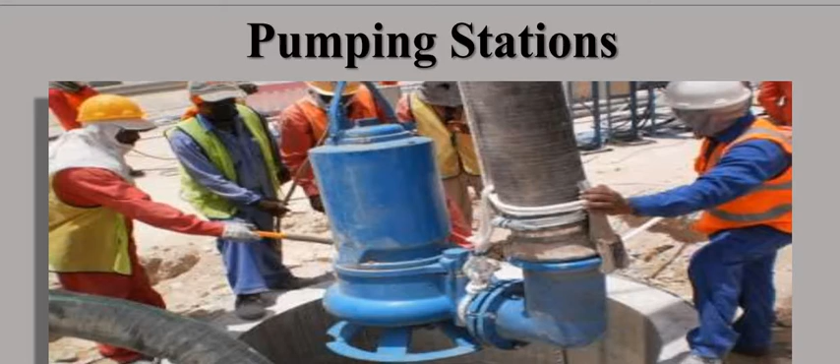Today we are going to discuss the new topic of sewage pumping and its stations, why it is necessary and where it is located. First we will go to the introduction section.

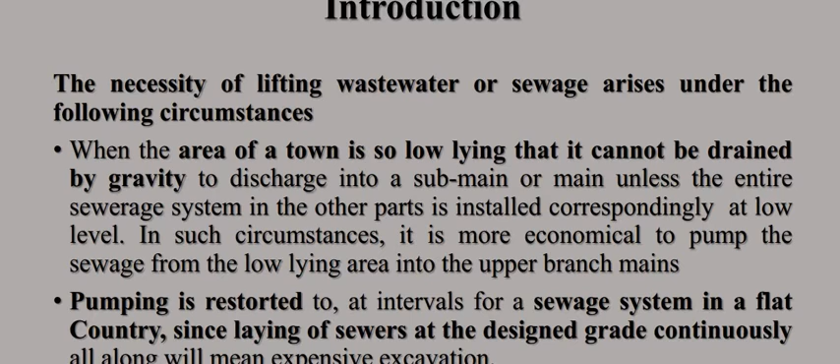The necessity of lifting the wastewater or sewage arises when the area of the town is so low lying that it cannot be drained by gravity to discharge into a sub-main or main, unless the entire sewerage system in the other parts is installed correspondingly at a low level. In such conditions it is more economical to pump the sewage from the low-lying area into the upper branches. The necessity of pumping arises when the wastewater cannot flow under the action of gravity, so we have to utilize the pump for lifting.

Similarly, this case arises when the area of the town is so low lying that it cannot be drained by gravity to discharge into the sub-main or main sewer, unless the entire sewerage system in the other parts is installed correspondingly. Hence the sewage in such areas should be pumped, as it is more economical to pump this sewage from this area.

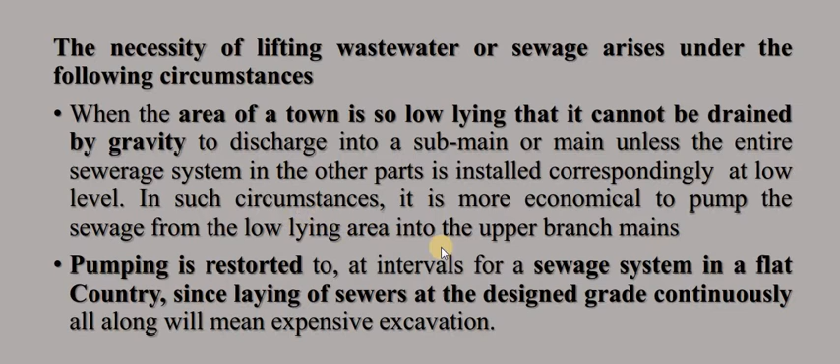Pumping is resorted to at intervals for a sewage system in a flat country, since laying sewers at a design grade continuously all along would mean expensive excavation. If we are working with a low or flat gradient, we will have to adopt pumping, because continuously maintaining the proper gradient or grade would require bearing expensive excavation. In such conditions, pumping is more economical than the conventional process of excavation to maintain the gradient.

Similarly, the necessity of pumping arises when the outfall sewer is at a lower level than the body of water into which it is to be discharged, or when the outfall is lower than the entrance to the treatment plant. The outfall sewer is the last point of the sewer, used to discharge into the other unit, and hence pumping arises in such conditions.

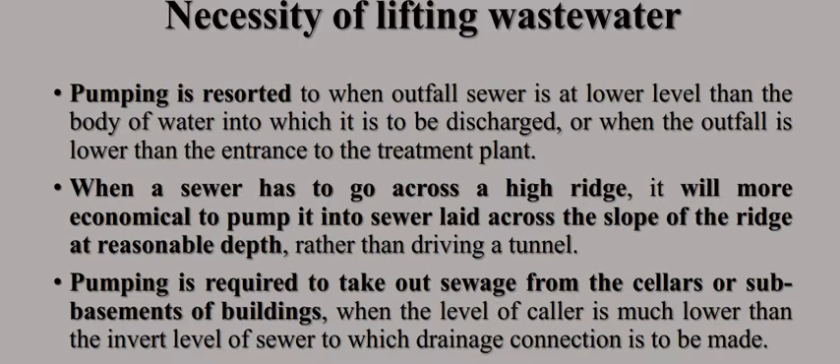Similarly, when a sewer has to go across a ridge, such as in hilly areas, it is more economical to pump the sewer across the slope of the ridge at a reasonable depth rather than driving a tunnel. In hilly areas we cannot drive a tunnel to pass sewage from one area to another when crossing a ridge, so pumping has to be adopted.

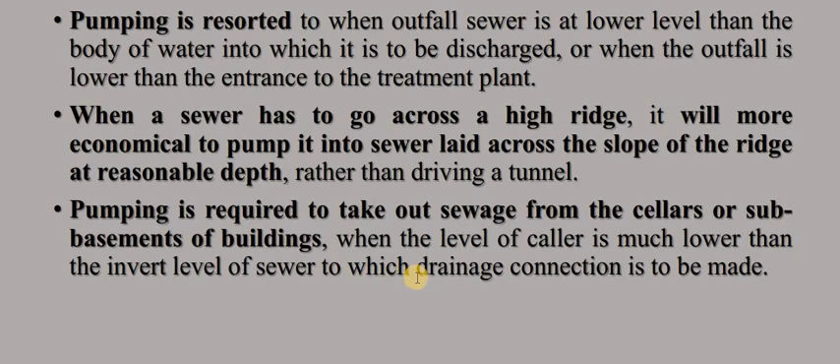Pumping is also required to take out sewage from cellars or sub-basements of buildings when the level of the cellar is much lower than the invert level of the sewer to which the drain connection is made. This means pumping is required from sub-mains, basements or sub-basements of residential buildings when the cellar is much lower than the invert level of the sewer, so we have to collect that sewage and transfer it into the existing sewer line.

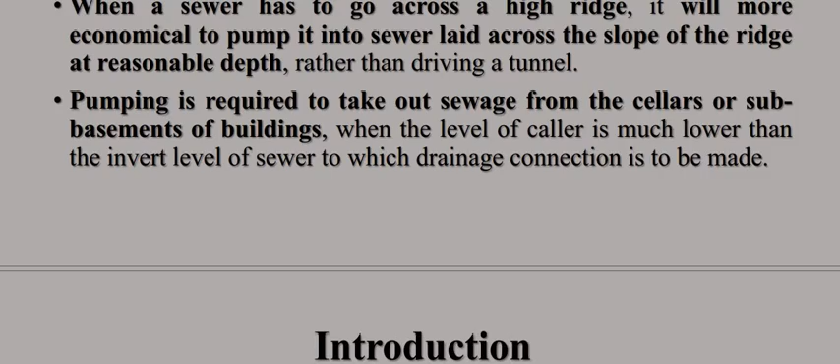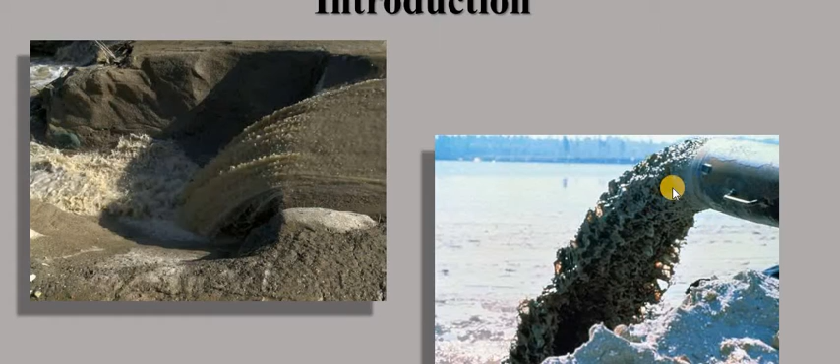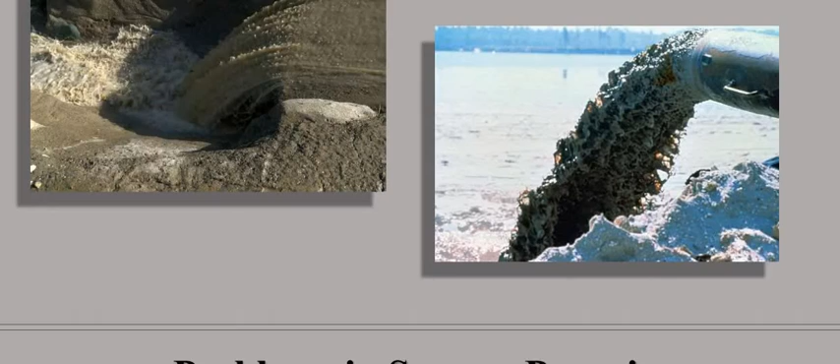These are existing photographs. This shows the hill areas where sewage passes from a ridge, and this is an outfall sewer where pumping is done to meet the water treatment unit and the collecting intake structure.

Now, what problems arise in sewage pumping? The pumping of sewage is not as simple as pumping of water, because the following special problems are associated with sewage.

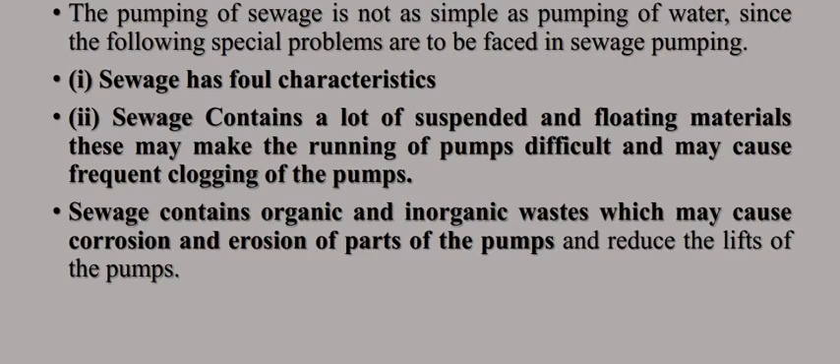First, sewage has foul characteristics. Second, sewage contains lots of suspended and floating matter, which may hinder the running of pumps and cause frequent clogging. Also, sewage contains organic and inorganic waste which may cause corrosion and erosion of the pumps, reducing the actual discharge efficiency. These are the basic characteristics associated with sewage, making its handling much more difficult than handling water.

Similarly, sewage contains lots of suspended and floating matter like grit and other materials, and this may cause frequent clogging of the pump.

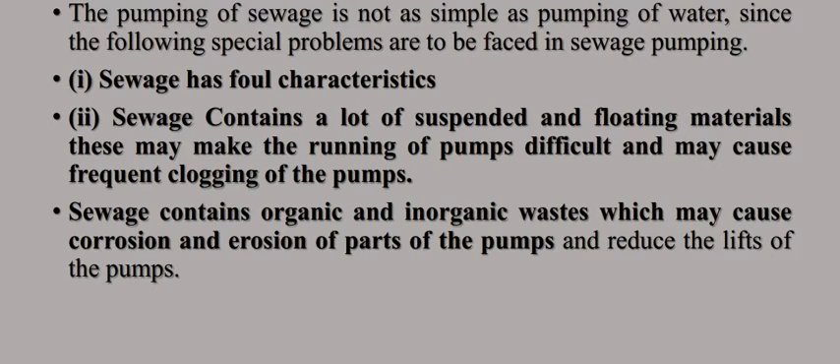Similarly, sewage contains organic and inorganic waste which may cause corrosion and erosion of the parts of the pump, and it reduces the lift of the pump and its life.

Now, what are the problems in sewage pumping? First, the rate of flow of sewage varies continuously, and hence pumping operations are to be adjusted accordingly. Second, the size of sump is limited, since large size sumps will result in the settlement of silts and organic matter at its bottom. Third, the pump should be of high order reliability, since failure of pumps will lead to flooding which may cause unbearable nuisance.

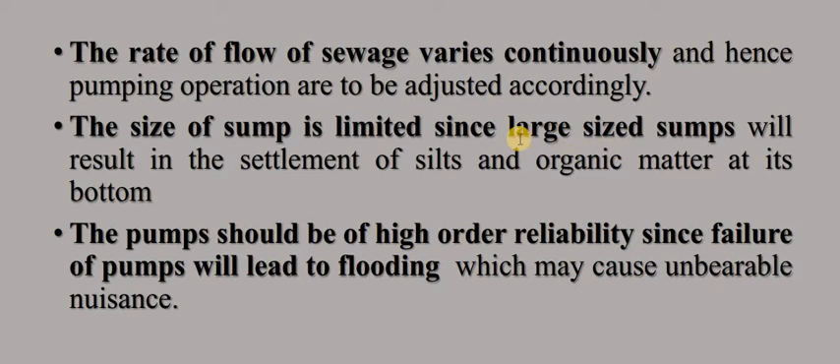So these are the basic problems we face while sewage pumping, along with its requirements: the rate of flow of sewage varies continuously; the size of sump is limited, since large sumps result in settlement of silts and organic matter, making it difficult to drain out or remove the settled sludge; and the pumps should be of high order reliability, since failure will lead to flooding.

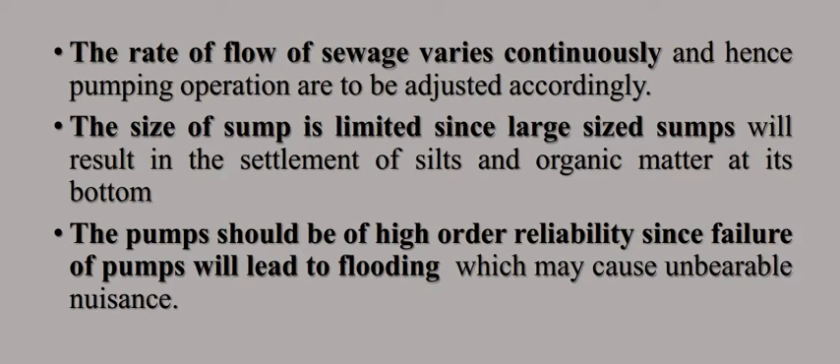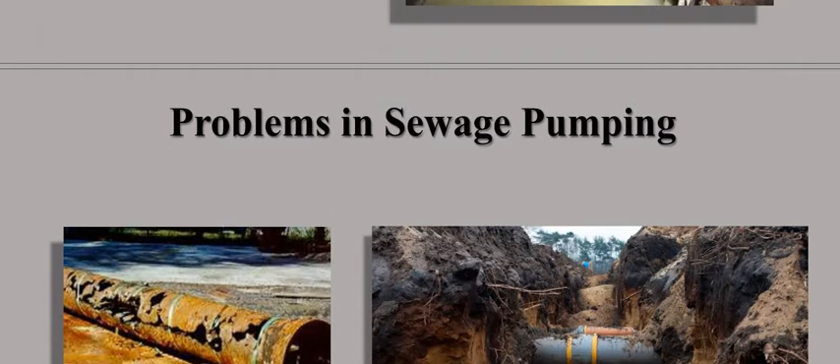These are pictures shown of actual sewage pumping. The rusted pipeline, corroded pipeline, the actual sewage pumping line shown in this figure.

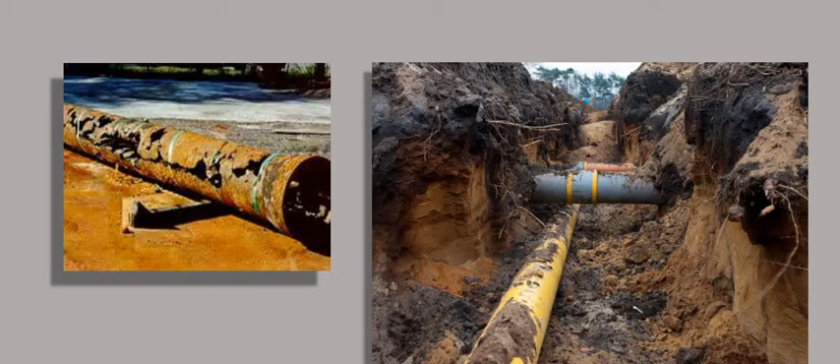Now, pumping station and location of pumping station. Which location or site should be selected for the pumping station? Proper location requires a comprehensive study of the area to be served, to ensure that the entire area or zone can be adequately drained.

If a large quantity of sewage is to be pumped, the site should be nearer a stream, a nallah, or a storm water drain into which sewage could be discharged during emergencies such as breakdown of the pumping plant or failure of power. In such situations the site should be near the stream where the sewage can be discharged, and during such emergencies it can be handled as is.

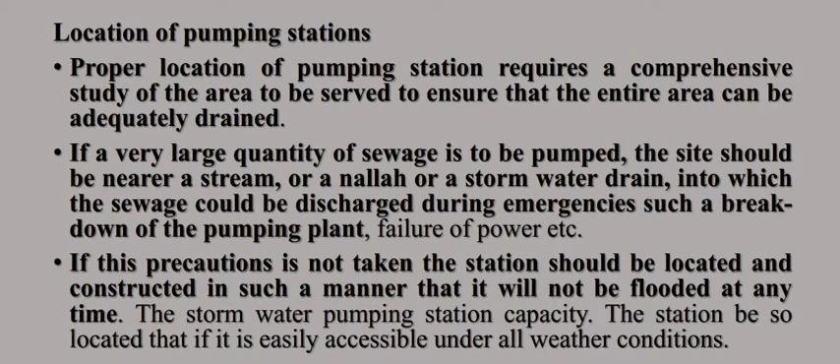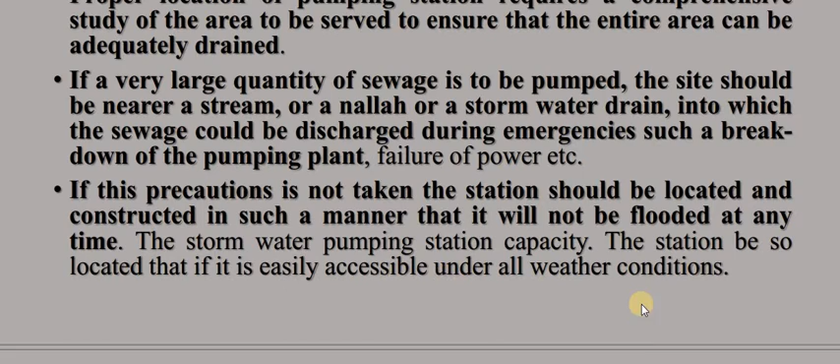If this precaution is not taken, the station should be located and constructed so that it will not be flooded at any time. The storm water pumping station capacity and location should ensure it is easily accessible under all weather conditions, meaning it should not be flooded by storm water. These are actual photographs showing where pumping stations are located.

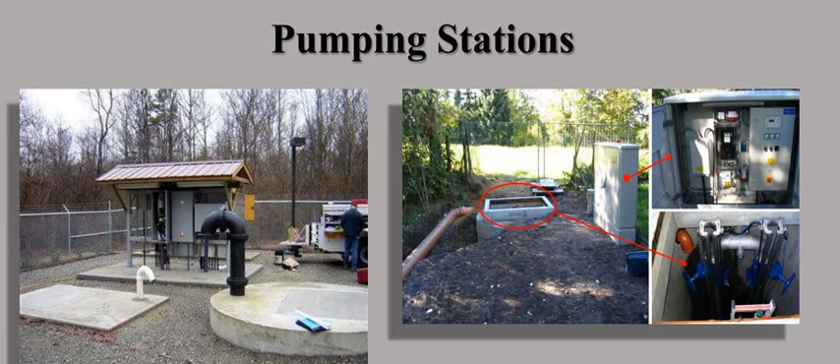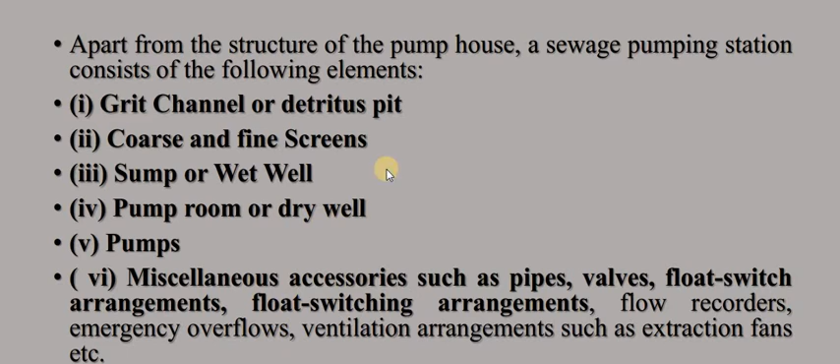Now, what are the elements of pumping stations? Apart from the pump house structure, a sewage pumping station consists of the following elements: grit channel or detritus pit, coarse and fine screens, sump or wet well, pump room or dry well, pumps, and other miscellaneous accessories such as pipes, valves, float switching arrangements, flow recorders, emergency overflows, and ventilation arrangements such as extraction fans. These are the components involved in the pumping station during the sewage pumping process.

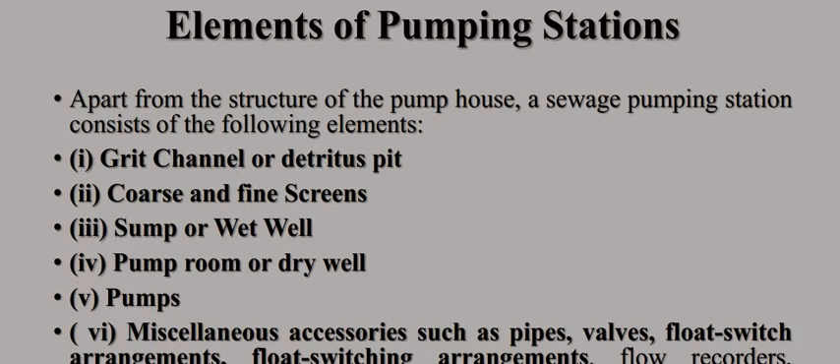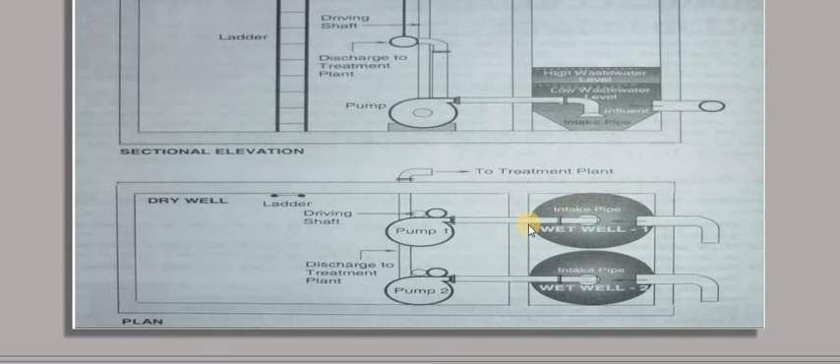Now we will see the sectional elevation so it will be easier to understand. After the sectional view of the plan, we come to know there are two components: dry well and wet well. In the dry well, the pump and its accessories are installed, and in the wet well the sewage water collected from the locality or zone is stored.

This is the intake pipe, and the influent sewage is collected at the wet well. The pump, having a suction pipe, is attached to that wet well, and the rising main, that is the delivery pipe, is attached to the treatment plant discharge pipeline. This is the driving shaft, since a motor operates the pump, and this leads to discharge at the treatment plant.

A ladder is provided so that we can easily access the structure for frequent maintenance if required. So these are the elements of the pumping station.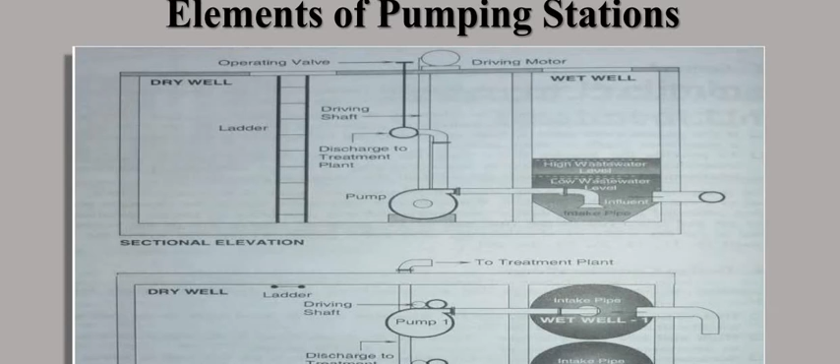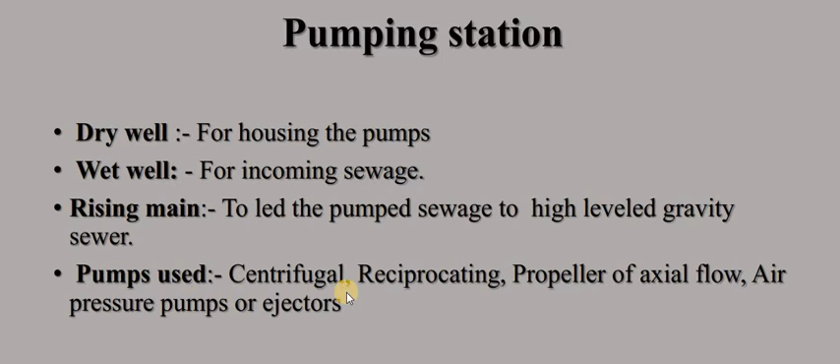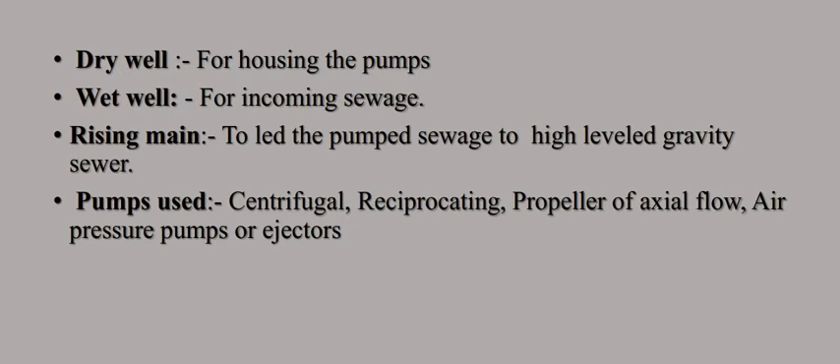So what is a pumping station? Its elements include the dry well, wet well, rising main, and pumps used. What are the various types of pumps used? Centrifugal, reciprocating, propeller or axial flow, air pressure pumps, or ejectors. These are the elements of the pumping station, that is, the pump house structure.

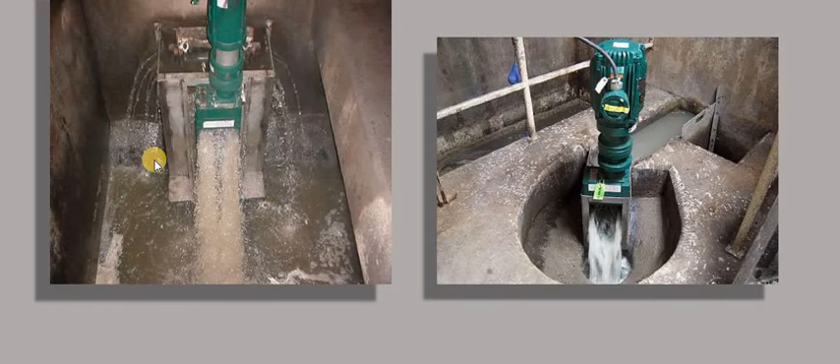We have seen this just now, so we will skip the theory. This is the actual working photograph of sewage pumping.

Now, pump house structure - a grit chamber is provided. The sewage entering the pumping station contains a lot of indestructible solid matter such as grit, rags, sticks, feces, etc., all in suspension as long as the sewage is flowing. It is essential to remove this matter before pumping to minimize wear and tear of the pump impeller and rising main. The grit is separated from the sewage by providing a grit chamber or after providing a screen. A grit channel is a long basin channel with enlarged cross section. You first have to understand what the grit chamber is - it is a chamber provided in the pump house structure.

In which all the suspended particles which can settle by their own weight after the process of screening are settled, so that grit particles such as grit, rags, sticks, sand, etc., which remain in suspension in the sewage flow, can be settled or removed. This minimizes wear and tear of the pump impeller and prevents it from coming in direct contact with the pump, removing it preliminarily before it enters the pumping station. So we generally provide a grit chamber before the sewage enters the sewage pump, and hence the grit is separated from the sewage by provision of a grit chamber before or after the screens.

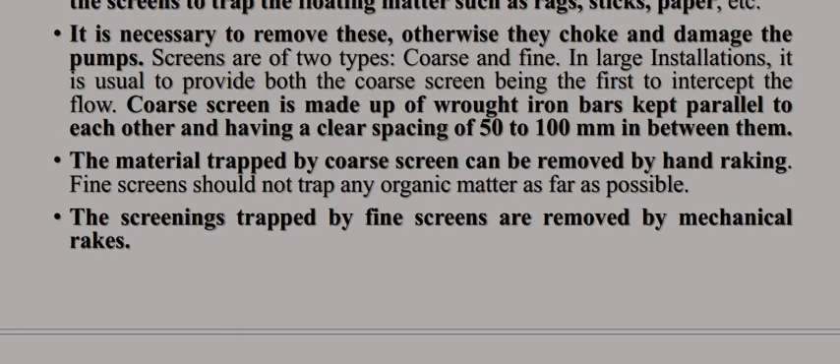Similarly, these are the screens. Screens are provided after the removal stage - sewage is made to pass through screens to trap floating matter such as rags, sticks, papers, etc. It is necessary to remove this material, otherwise it will choke and damage the pumps. Screens are of two types, coarse and fine. In large installations, it is usual to provide both, coarse being the first to intercept the flow. Coarse screens are made of wrought iron bars kept parallel to each other with clear spacing of 50 to 100 mm, and material trapped by coarse screens is removed by hand raking, while screenings trapped by fine screens are removed by mechanical rakers.

So these are the screens which are generally provided after the grit chamber, so that fine materials settle in the grit, and floating matter is arrested in the screen. The collected matter in the screens can be removed by hand raking in coarse screens, and in fine screens it is removed by mechanical rakes. Okay, moving ahead.

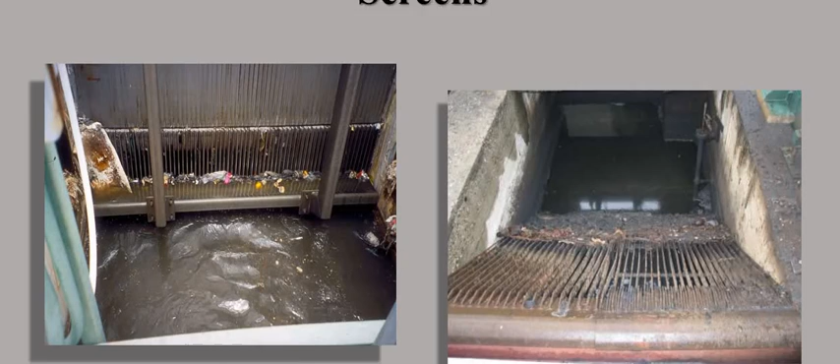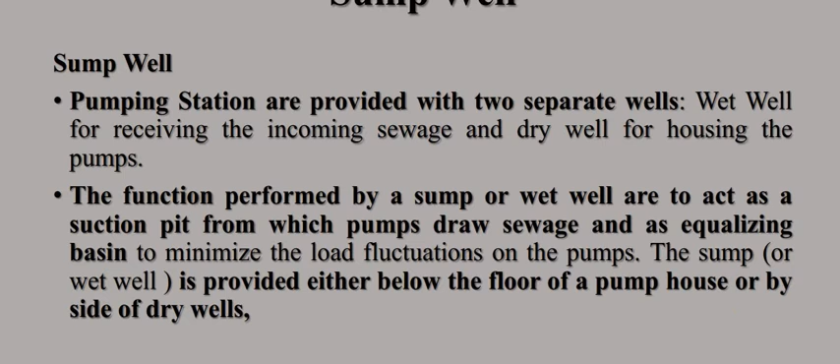Sump well - pumping stations are provided with two separate wells, a wet well for receiving the incoming sewage and a dry well for housing the pumps, which we have just now seen in the elements of the pumping station. This is the sump well in which the sewage is collected.

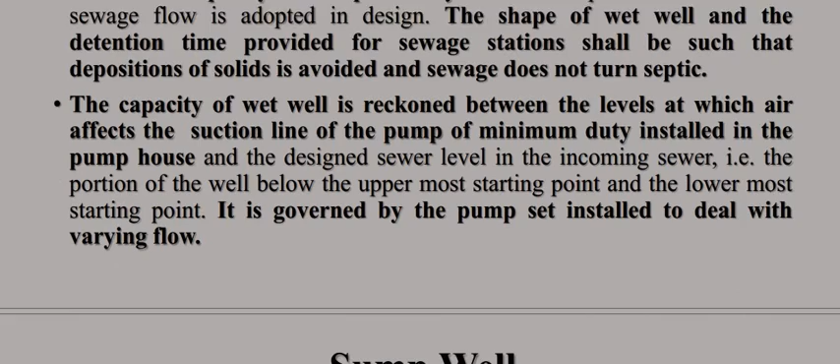Now, rising mains, valves and fittings. This means the pumped sewage is led to a high level gravity sewer through rising mains. The rising mains are made up of steel, cast iron, spun iron, or asbestos cement pressure pipes. Generally, cast iron pipes with flange joints are provided. The flange joint provides easiness in dismantling for repair of pumping station equipment. The length of the discharge pipe should be kept as small as possible because long detention of sewage in closed pipes under pressure causes anaerobic deterioration.

This is a very important line: as far as possible, the rising main should rise steadily from the pumping station to the point of discharge. The velocity of flow in the rising main should not be less than 0.75 meter per second, and at the same time velocity higher than 2 meter per second should be avoided.

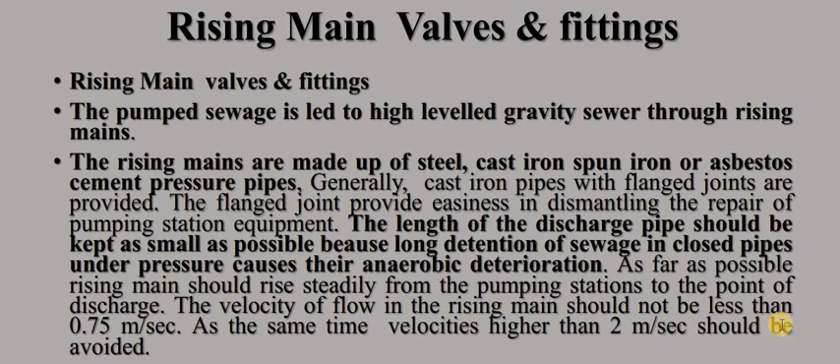You have to understand what rising main is - it is the delivery pipe, made up of steel, cast iron, spun iron, or asbestos cement. Generally cast iron pipes with flange joints are provided, because it is easy to dismantle or repair the pumping station equipment. Now this is the most important line, because the length of the discharge pipe should be kept as small as possible, because long detention of sewage in closed pipes under pressure causes anaerobic deterioration.

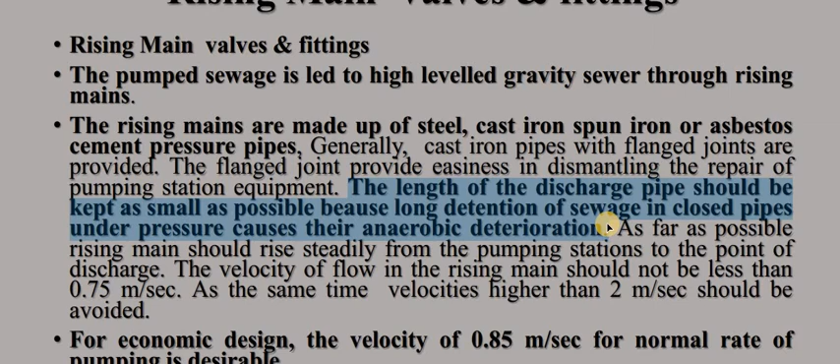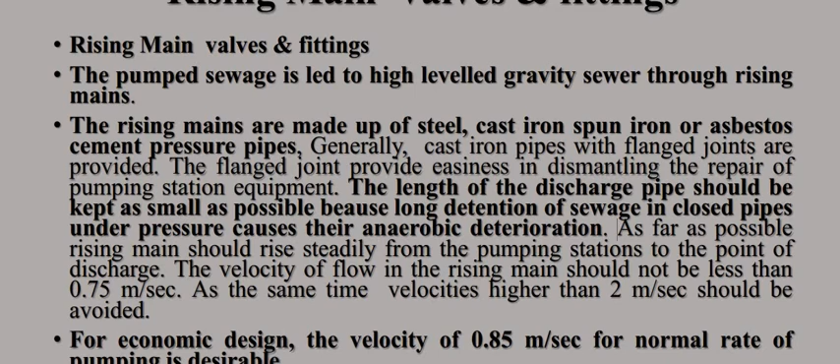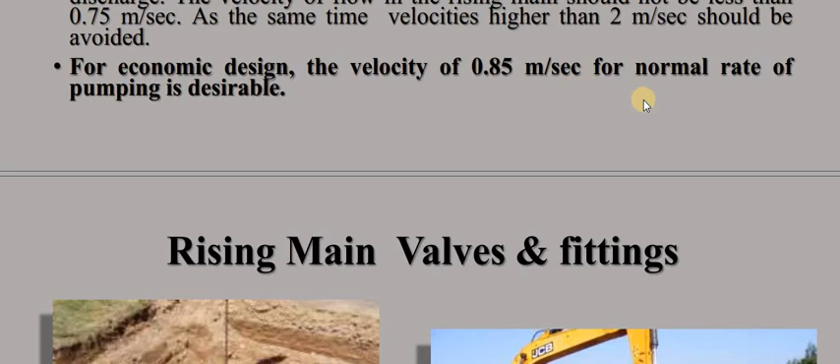Because if we use long pipes to carry the sewage discharge from the rising main, anaerobic decomposition will start in the pipe itself, and this is the reason we have to keep the discharge pipe as small as possible. For economic design, a velocity of rising main of 0.85 meter per second for normal rate of pumping is desirable. So these are the rising mains - the discharge pipe, valves and fittings.

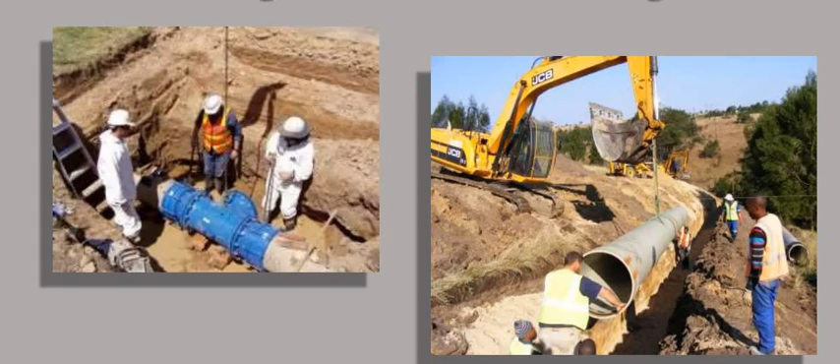Now which valves are provided? A reflux or non-return valve is provided on the rising main just next to the pump to prevent backflow through the pump when the pump is stopped.

A check valve should be provided in the sewer line discharging the sewage to prevent backflow of sewage during floods in the river or discharging area.

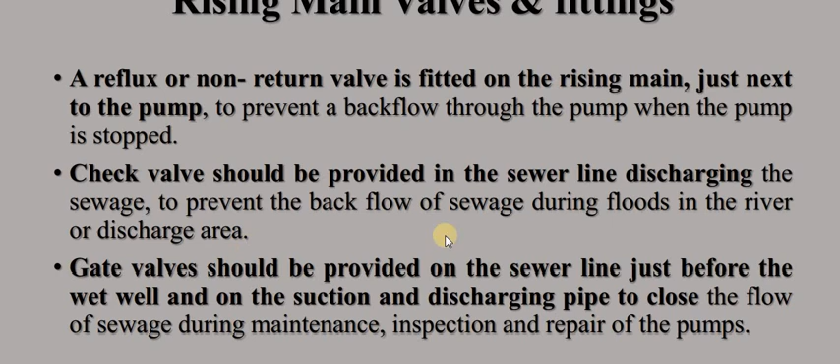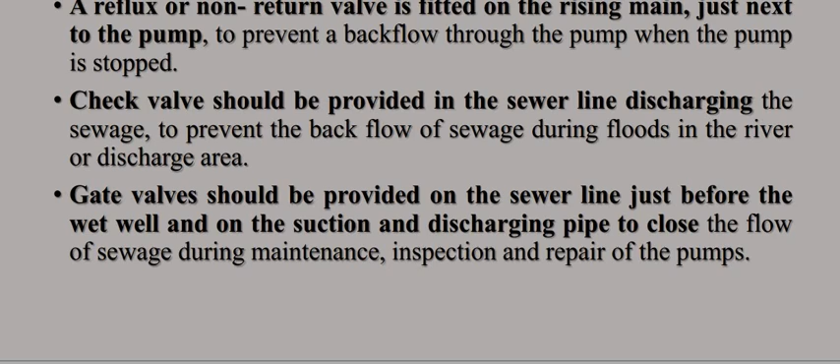Similarly, a gate valve should be provided on the sewer line just before the wet well, and on the suction and discharge pipe, to close the flow of sewage during maintenance, inspection and repairs. So these are the fittings: check valves, non-reflux valves, and gate valves.

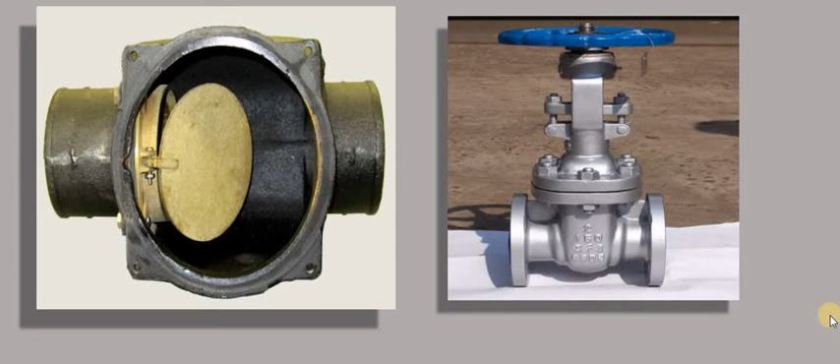Which types of pumps are we using? Following are the types of pumps commonly used for sewage and storm water pumping: first, most commonly, centrifugal pumps; second, reciprocating pumps; third, propeller or axial flow pumps; and fourth, air pressure pumps or ejectors, sometimes called pneumatic ejectors. Moving further, we will see the pump types in detail.

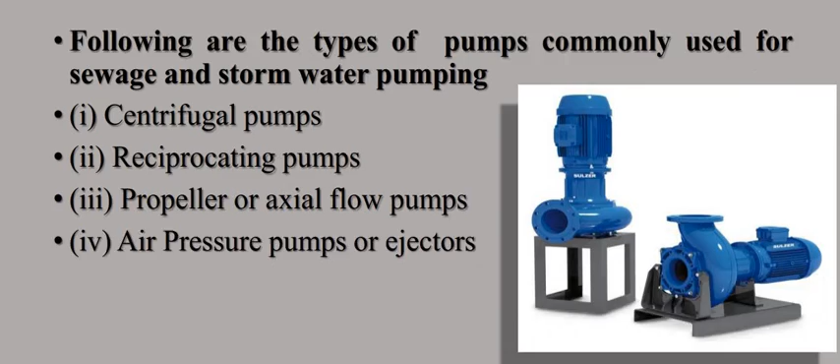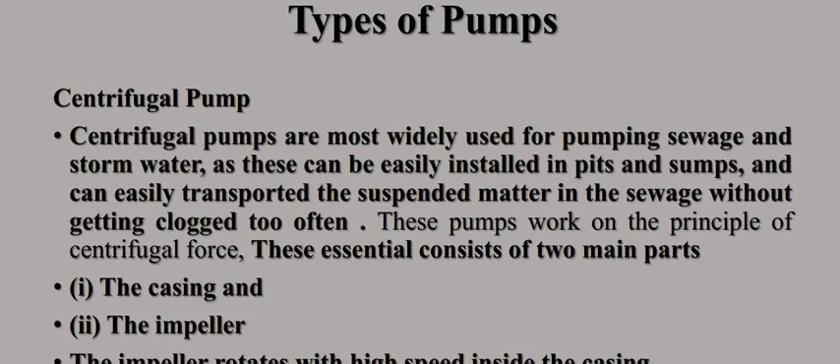The types of pumps - first, centrifugal pumps. Centrifugal pumps are most commonly and widely used for pumping sewage and storm water, as they can easily be installed in pits and sumps and can transport suspended matter in sewage without getting clogged too often. These pumps work on the principle of centrifugal force and essentially consist of two main parts: the casing and the impeller, which rotates at high speed inside the casing.

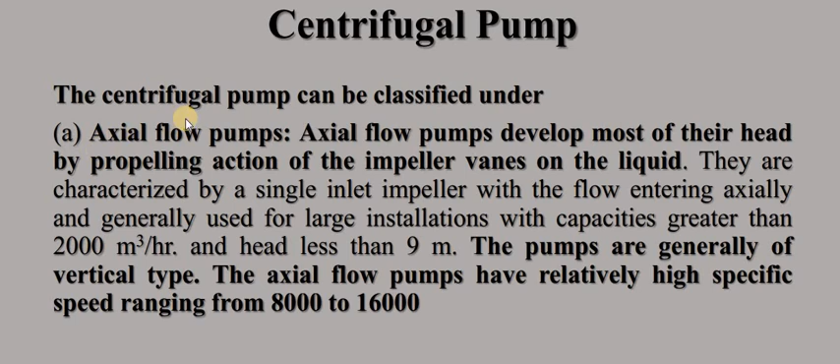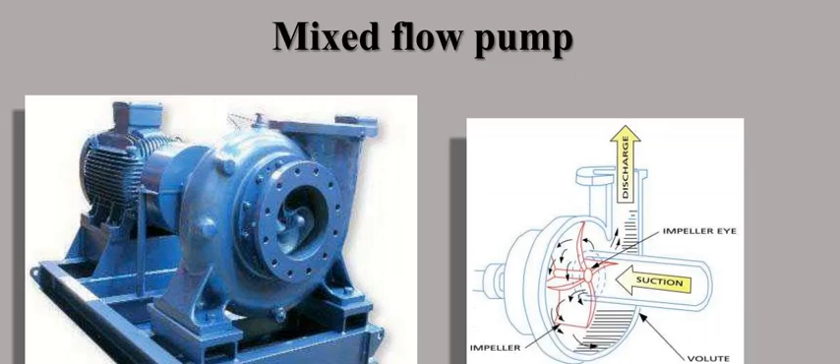Now, next is reciprocating pumps. Reciprocating pumps are more or less obsolete in modern sewage pumping stations, since they are liable to get clogged by solids or fibrous materials, even though the sewage may have to pass through coarse screens. Also, their initial cost is higher and efficiency is lower than that of centrifugal pumps.

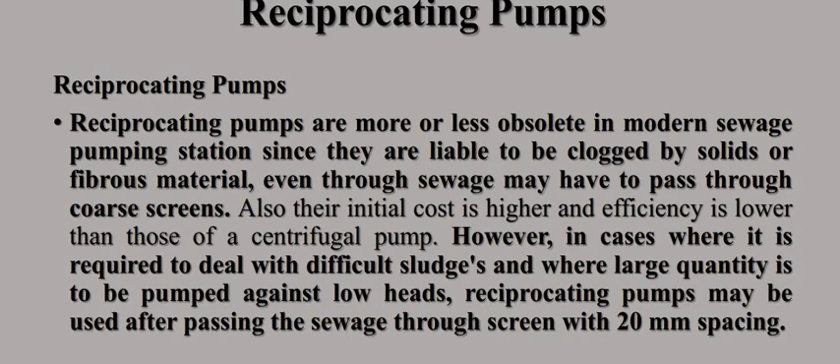However, in cases where it is required to deal with difficult sludge and where a large quantity is to be pumped against low head, reciprocating pumps may be used after passing the sewage through a screen with 20 mm spacing. Reciprocating pumps are of two types: the ram type and the propeller type.

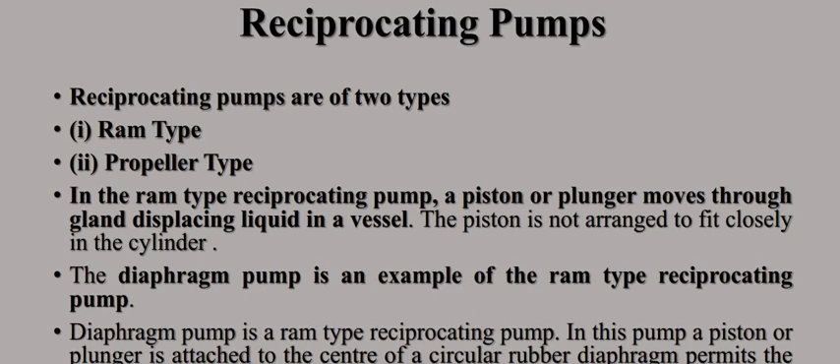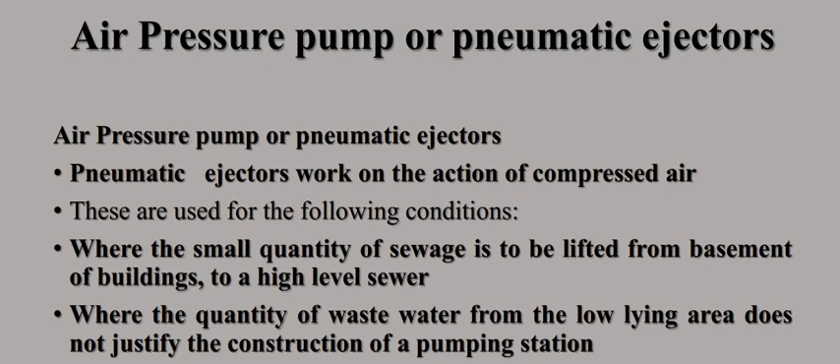Next is the air pressure pump or pneumatic ejector. It works on the action of compressed air.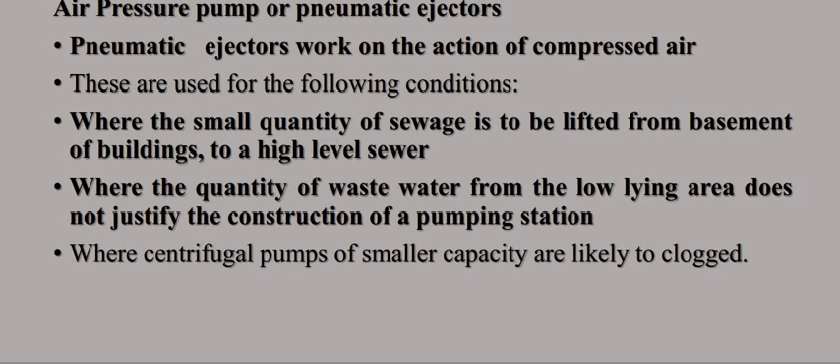These are used in the following conditions: where a small quantity of sewage is to be pumped from the basement of a building to a higher level sewer; where the quantity of wastewater from low-lying areas does not justify construction of a sewage pumping station; and where centrifugal pumps of smaller capacity are likely to be clogged - in such situations, ejectors are used.

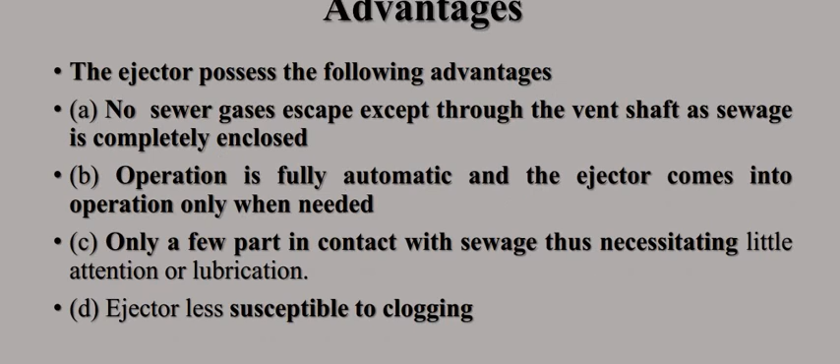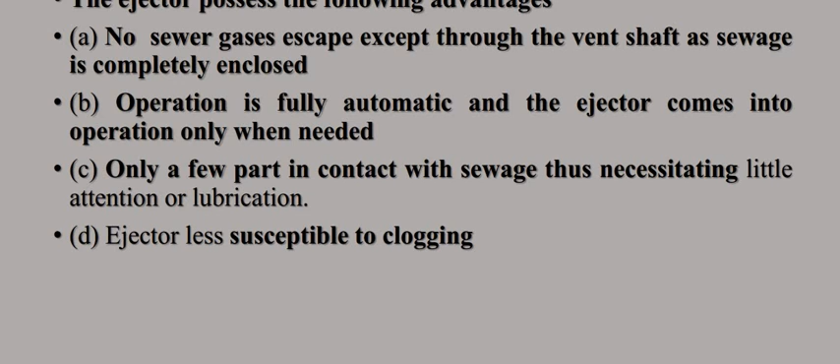Only a few parts are in contact with sewage, thus requiring little attention or lubrication. The ejector is less susceptible to clogging. These are reasons why pneumatic ejectors are often used.

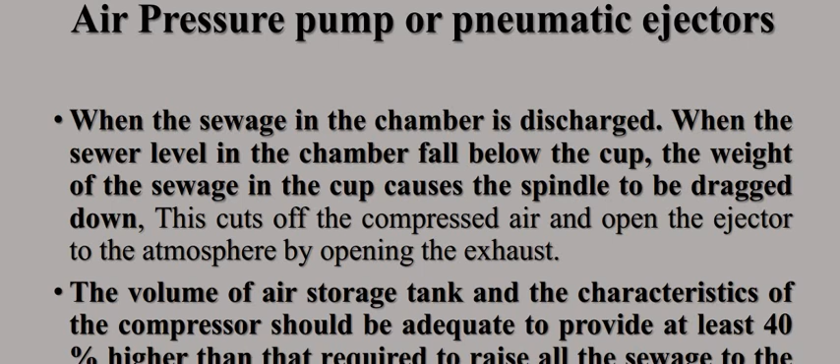Now the air pressure to be maintained in pneumatic ejectors is mentioned here. When the sewage in the chamber is discharged, and the sewage level in the chamber falls below the cup, the weight of the sewage in the cup causes the spindle to be dragged down. This cuts off the compressed air and opens the ejector to the atmosphere by opening the exhaust. This is the working phenomenon of the ejector.

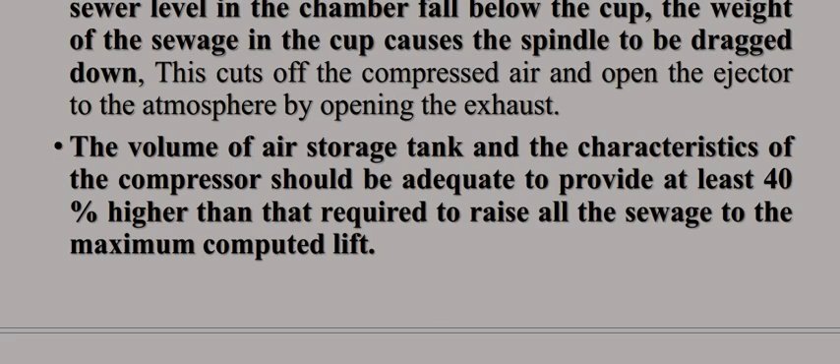The volume of air stored is in the air storage tank, and the characteristics of the compressor should be adequate to provide at least 40% higher capacity than required to raise all the sewage to the maximum computed lift.

Now, power required for the pumps. Power for operation of the pumps can be supplied using the following methods: steam engines, internal combustion engines, and electric motors. Electric motors are widely used, while the other two methods are used only in some special circumstances.